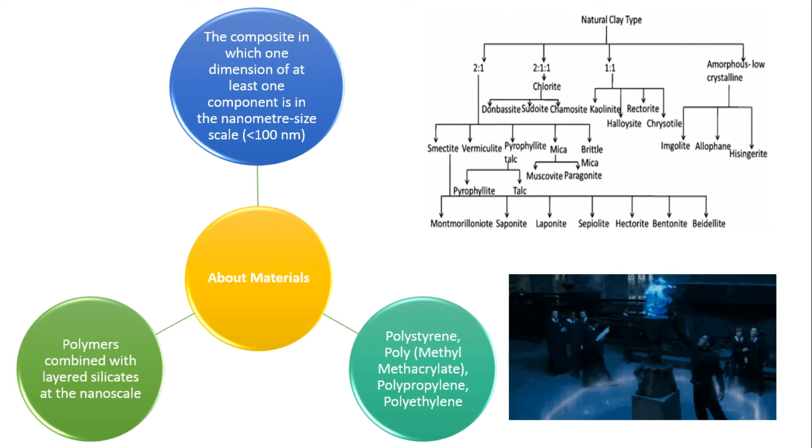Polymer clay nanocomposite? It is the polymers combined with layered silicates at the nanoscale to form nanocomposite. Besides, the composite in which one dimension of at least one component is in the nanometer size scale, less than 100 nanometers, is defined as nanocomposite material.

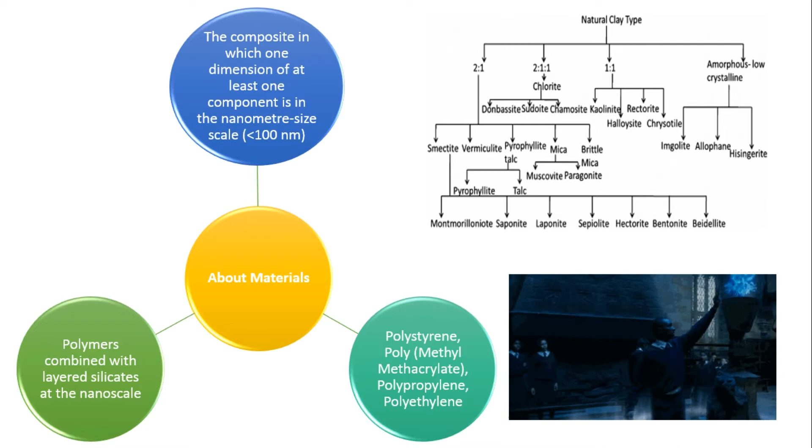Polymer nanocomposite emerged as one of the most promising developments in the area of flame retardancy, appearing to offer significant advantages over conventional formulations. For instance, polystyrene, polymethyl methacrylate, polypropylene, and polyethylene.

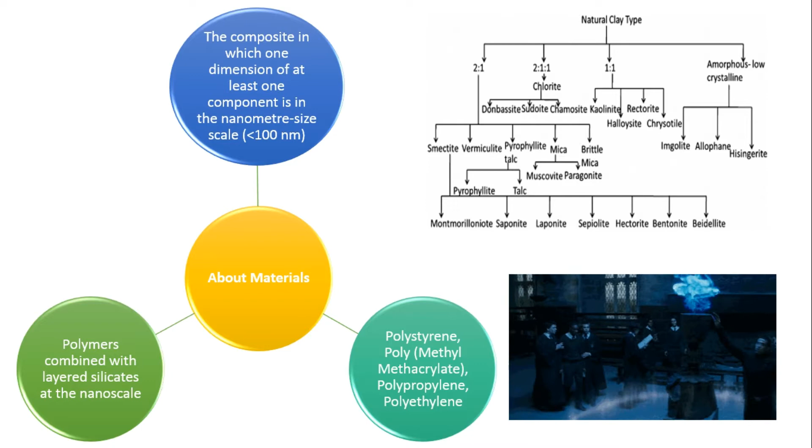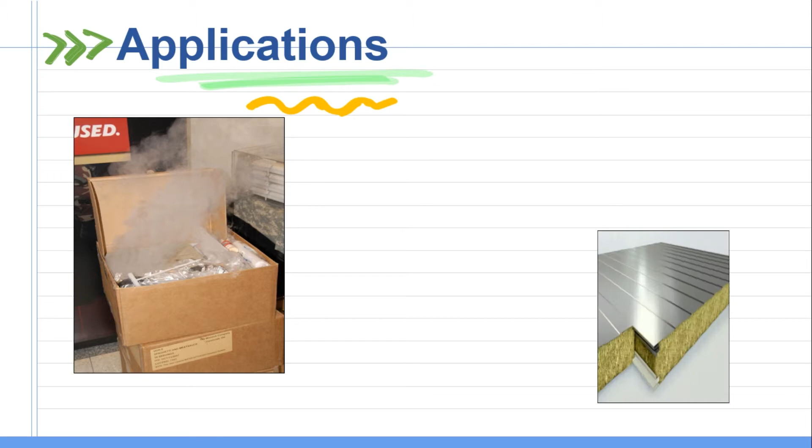Subsequently, it is applied in food packaging, flame retardant wall panels, textile fabrics, and also flame retardant doors.

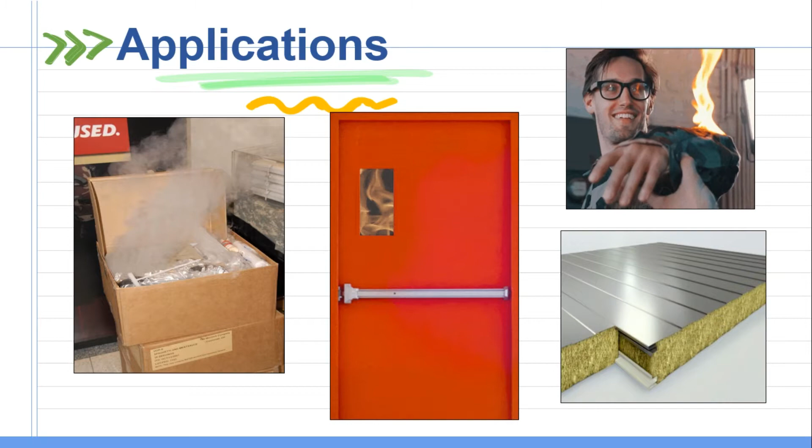Moving on to the drawbacks and limitations, halogen-based flame retardants were used, and these materials were found to be effective for flame retardation. However, these materials were inhibited due to their associated environmental pollution.

Other than that, metal hydroxide have been used as flame retardant additives, but their high effective loading was attributed to poor dispersion and drawbacks in mechanical properties of polymer composites.

On the other hand, the use of clays greatly limits the class of miscible polymers only to hydrophilic ones, mainly polyethylene oxide and polyvinyl alcohol.

Clay usually contributes to stability by acting as a heat insulator and as a mass transport barrier to oxygen and the volatiles generated during polymer degradation. The improvement in thermal stability may be limited by the clay itself or the decomposition products of the organic modifier, which can catalyze the degradation of the polymer matrix.

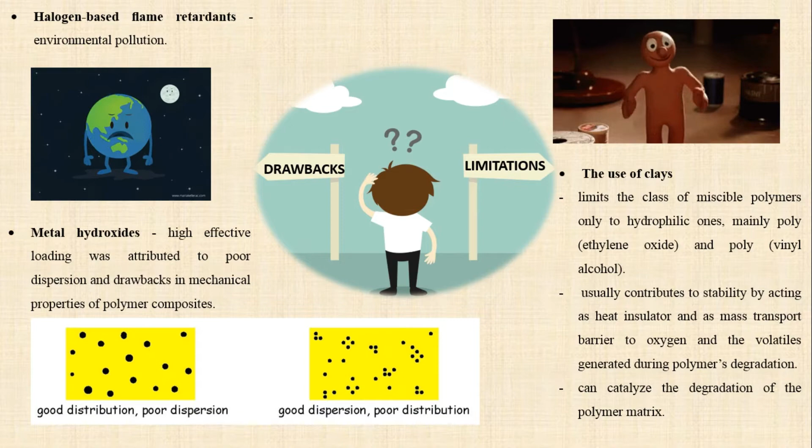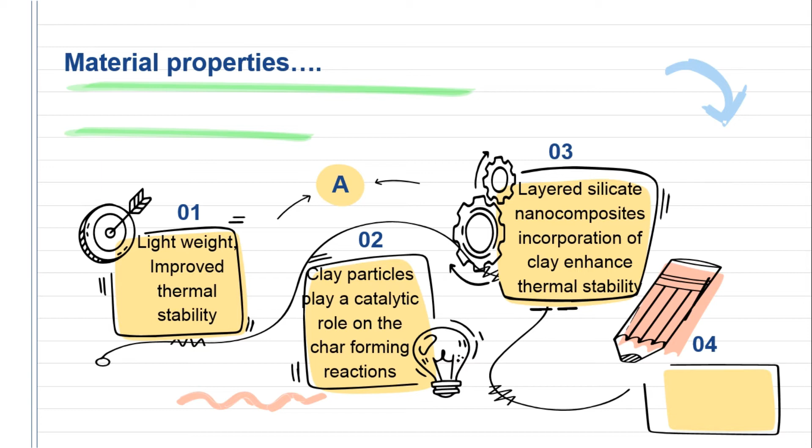Next, the properties of the material. First, lightweight and improved thermal stability. Second, clay particles play a catalytic role on the char-forming reaction. Third, the layered silicate nanocomposites incorporation of clay enhance the thermal stability. So, the last properties are high modulus and also increased solvent resistance.

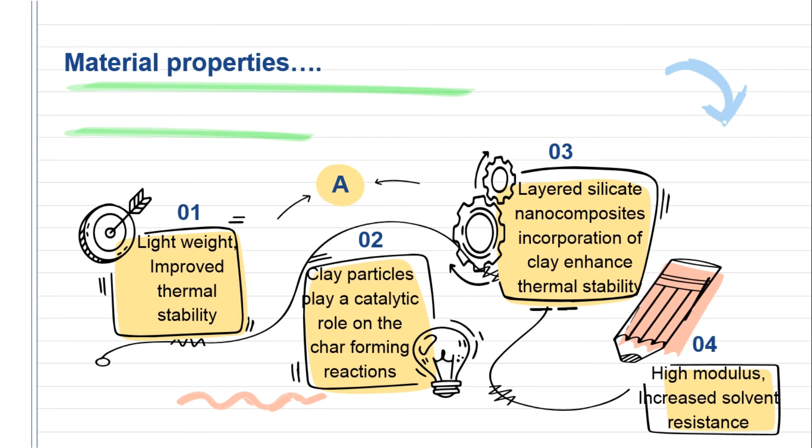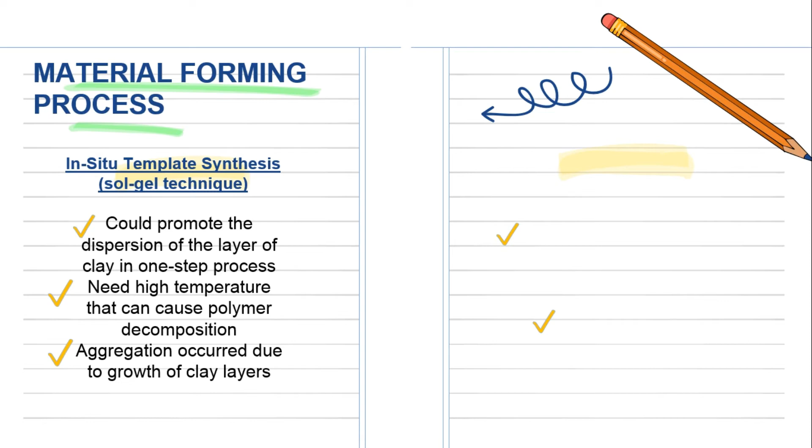Now, let's proceed with the material forming process. Type 1 process is in situ template synthesis, or so-called sol-gel technique. In this process, it could promote the dispersion of the layer of clay in a one-step process. Next, the sol-gel technique needs high temperature that can cause polymer decomposition. And in this process, aggregation occurred due to growth of clay layers.

Type 2 forming process is solvent-assisted blending. This process is difficult to use in industry due to large amounts of solvents being used during synthesis. Last but not least, this process is environmentally disadvantageous.

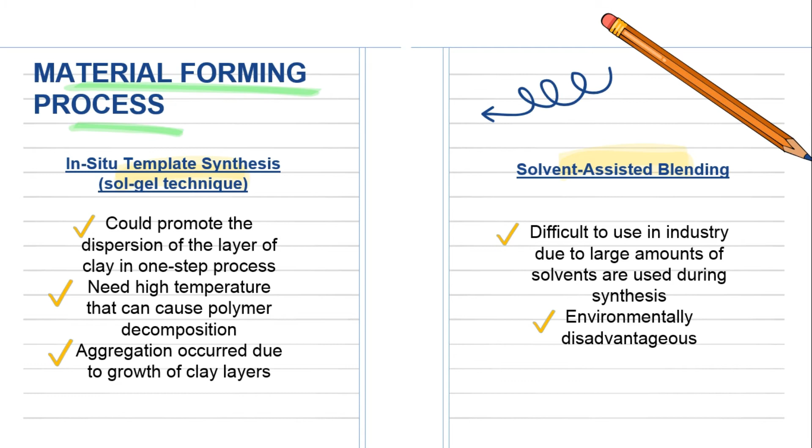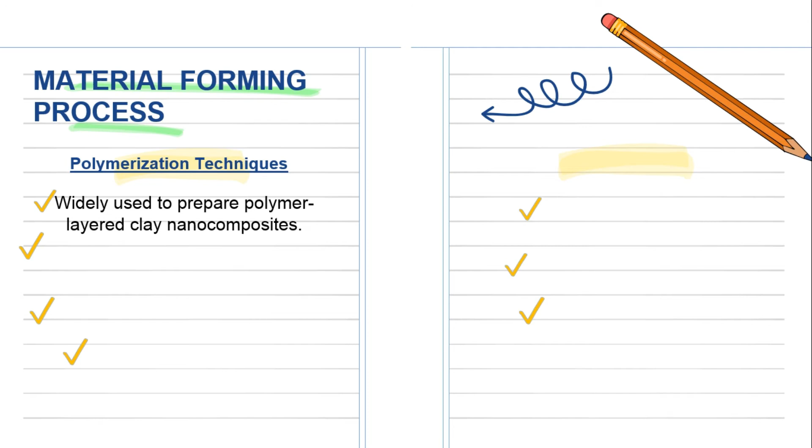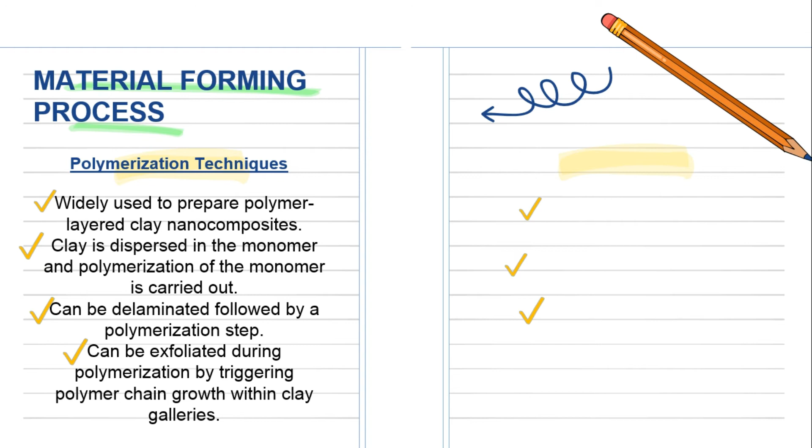For type 3, the forming process is polymerization technique. Polymerization techniques are widely used to prepare polymer layered clay nanocomposites. The clay is dispersed in the monomer and polymerization of the monomer is carried out. This forming process can be delaminated followed by a polymerization step. Last but not least, this technique can be exfoliated during polymerization by triggering polymer chain growth within clay galleries.

And for the last type of forming process is called melt blending. This process is most utilized for the preparation of nanocomposites, and it is suitable for large-scale production. Lastly, melt blending utilizes existing conventional polymer processing equipment like extrusion and also roll mixing.

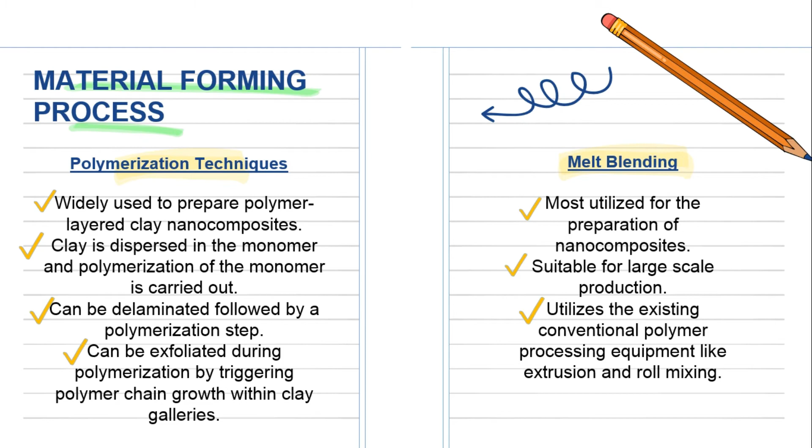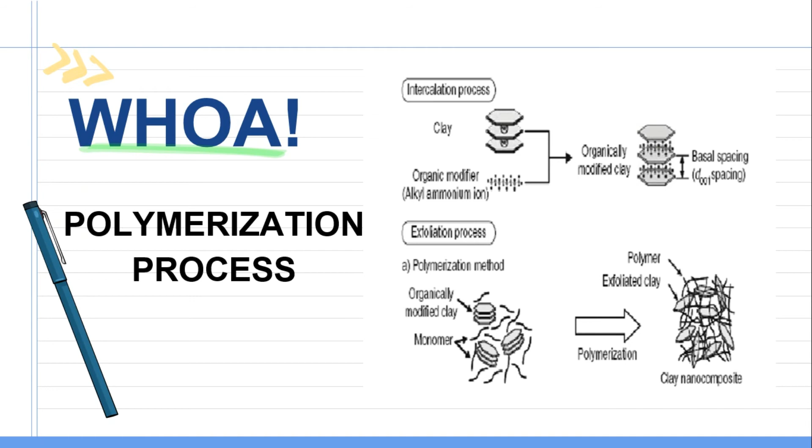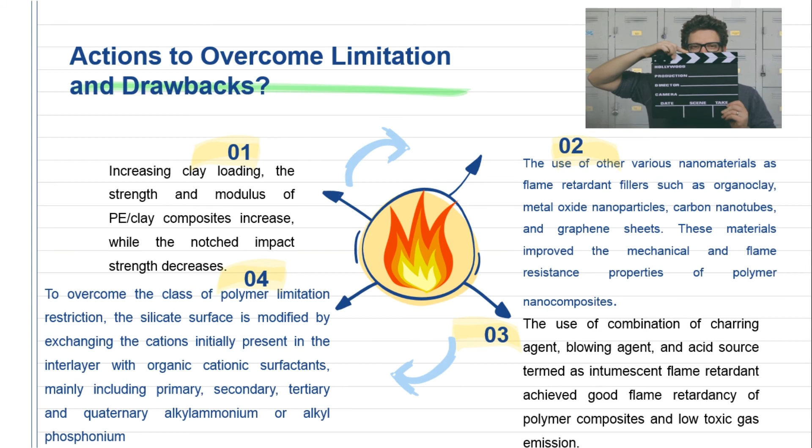So for the next actions, various aluminosilicates have been used as flame retardant fillers such as montmorillonites, halloysite nanotubes, and zeolites. These materials were used alone and in conjunction with other conventional flame retardant materials as synergistic fillers.

Last but not least, phosphorus containing flame retardants have been used, which were based on condensed phase action through char forming effect.